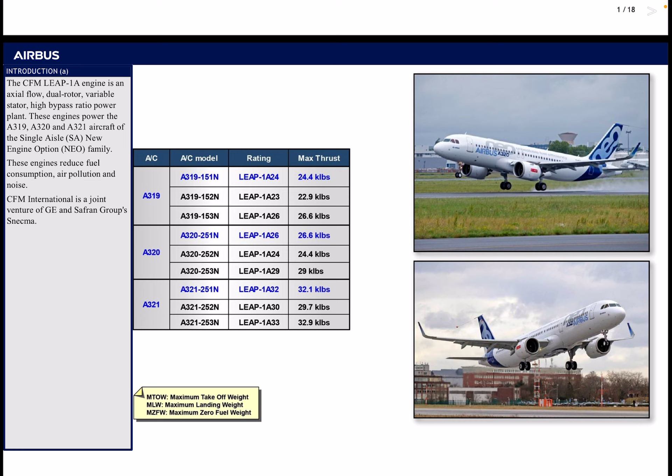As we said, this is a New Engine Option family. This engine reduces fuel consumption, air pollution, and noise. CFM International is a joint venture of GE and Safran Group.

The CFM LEAP 1A engine is available in several thrust ratings from 23 kilo LBS to 33 kilo LBS. For each model, the basic thrust ratings are referred to with 1, which is basic thrust rating, 2 for reduced thrust ratings, and 3 for increased thrust ratings.

As we can see in the table, the A320 is categorized into 3 aircraft models. One has a maximum thrust of 26.6 kilo LBS, another has 24.4 kilo LBS, and the last one of A320 has 29 kilo LBS.

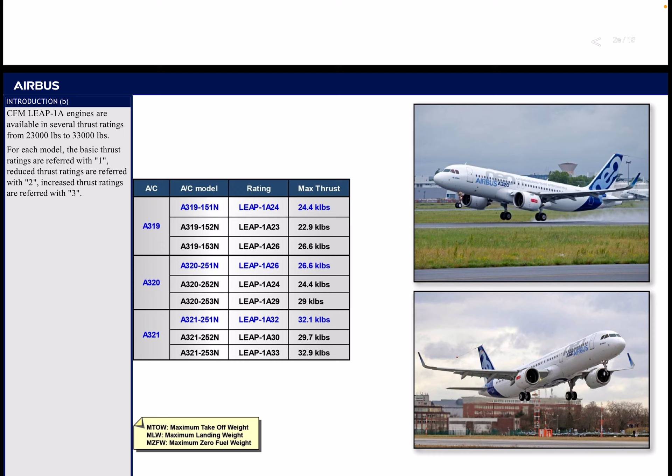The engine is attached to the pylon by forward and aft mountings, as usual in different aircraft, to transmit the engine and thrust loads to the aircraft fuselage. The pylon connects the engine to the wing structure. The engine nacelle ensures smooth airflow both around and into the engine, protects the engine and engine accessories, provides engine noise attenuation, and permits access to the engine and its components for servicing.

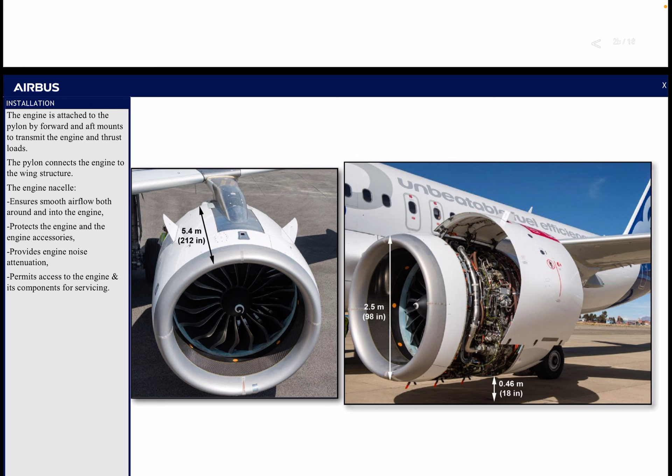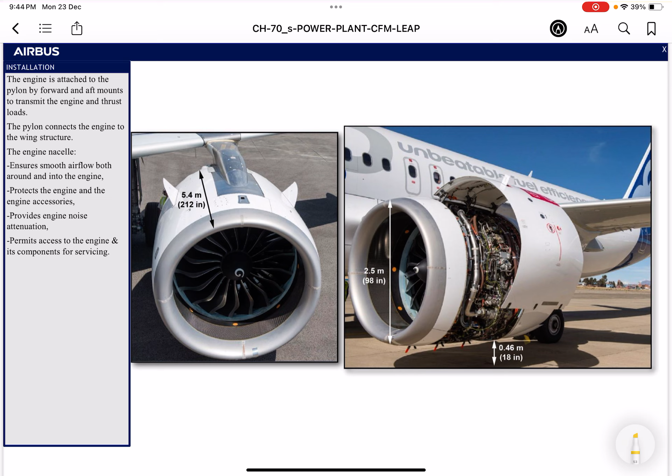As we can see, there's a little bit of clearance in there.

The power plant major components are air intake or inlet cowl, fan cowl doors with 3 latches, thrust reverser cowl doors with 8 latches, engine build-up, exhaust nozzle, and tail plug.

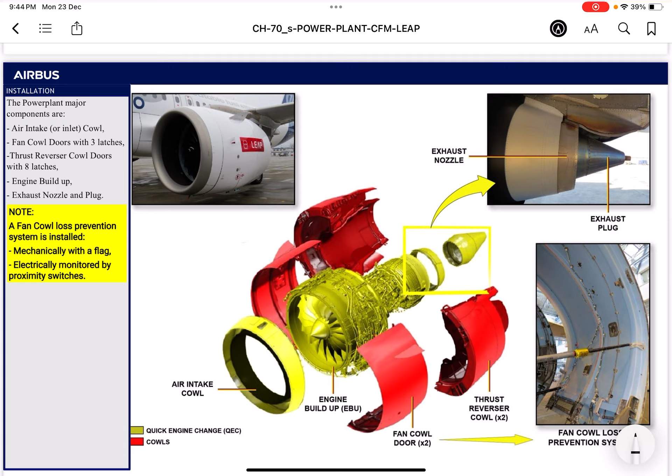The red part is a cowl for the engine. This is a fan cowl door, and this is a thrust reverser cowl. The engine build-up is the core engine for the A320 family, and there is an air intake cowl to preserve and keep the engine protected, along with its fan.

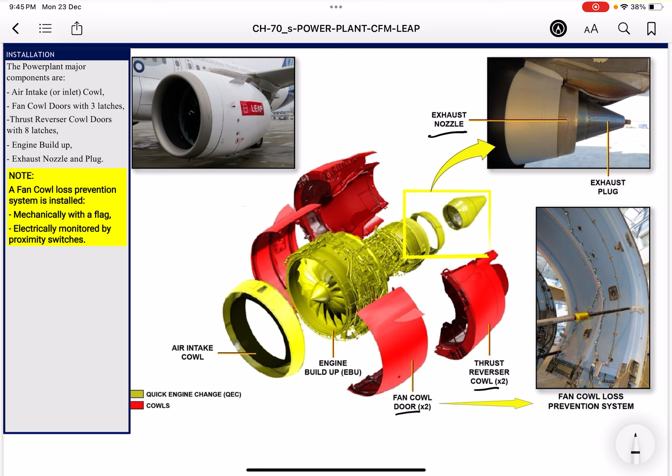This is the exhaust nozzle, exhaust plug, and fan cowl loss prevention system.

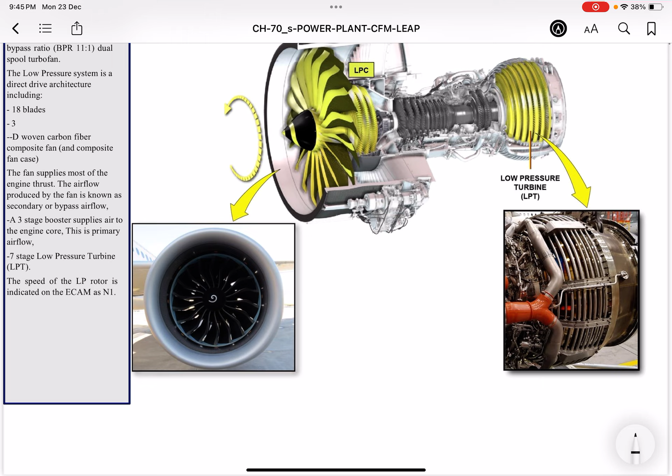The CFM LEAP 1A is a high bypass ratio, 11:1, dual spool turbofan. The low pressure system is a direct drive architecture including 18 blades and a 3D woven carbon fiber composite fan and composite fan case. As we can see, the fan itself is made from carbon fiber composite, and the fan case itself is also made up of composite material. The fan supplies most of the engine thrust, as we know.

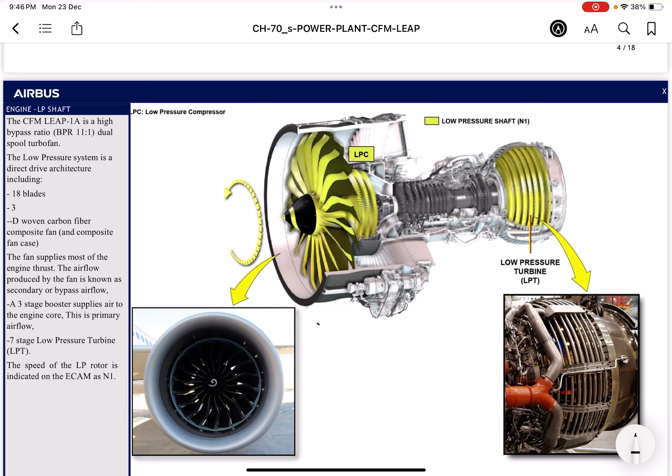The airflow produced by the fan is known as secondary or bypass airflow. A 3-stage booster supplies air to the engine core; this is the primary airflow. There are also 7-stage low-pressure turbines. The speed of the low-pressure rotor is indicated on the ECAM as N1. This is the engine LPC and LPT, low pressure compressor and low pressure turbine.

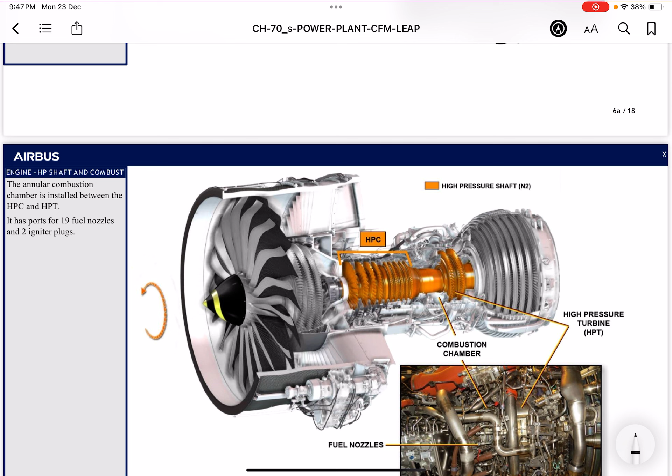The combustion chamber is of annular type, installed between the high pressure compressor and high pressure turbine. It has ports for 19 fuel nozzles and 2 igniter plugs.

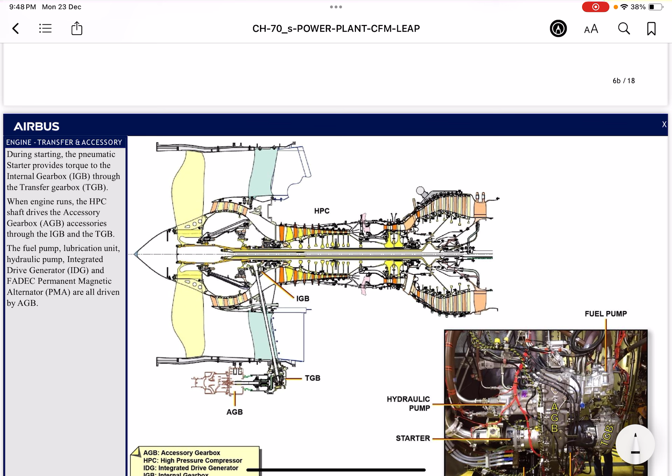During starting, the pneumatic starter provides torque to the internal gearbox through the transfer gearbox. When the engine runs, the high pressure compressor shaft drives the accessory gearbox accessories through the IGB, or internal gearbox, and transfer gearbox.

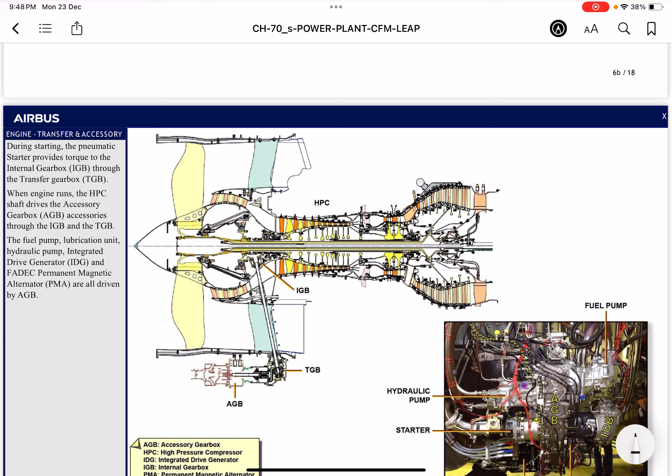The fuel pump, lubrication unit, hydraulic pump, integrated drive generator or IDG, and FADEC permanent magnetic alternator are all driven by the AGB, or accessory gearbox. This is the accessory gearbox, and this is the TGB, or transfer gearbox.

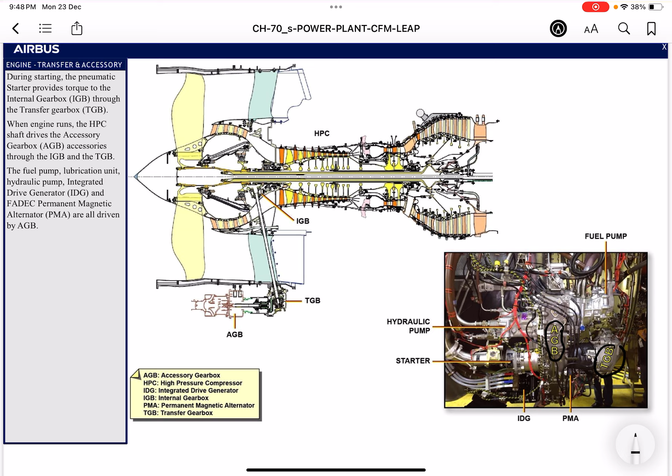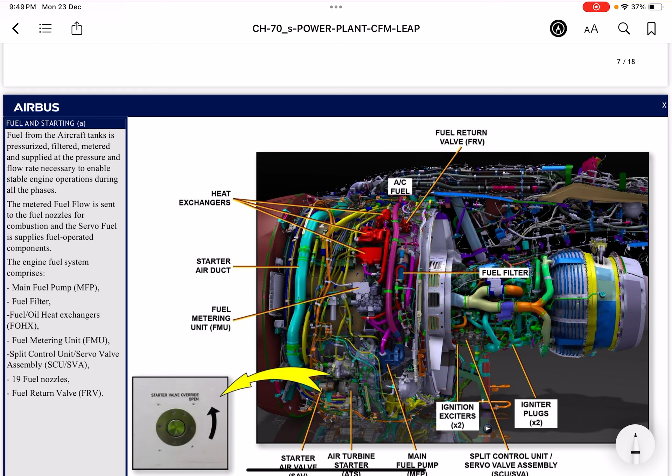Fuel from the aircraft tanks is pressurized, filtered, metered, and supplied at the pressure and flow rate necessary to enable stable engine operation during all phases. The metered fuel flow is sent to the fuel nozzle for combustion, and the servo fuel supplies fuel-operated components.

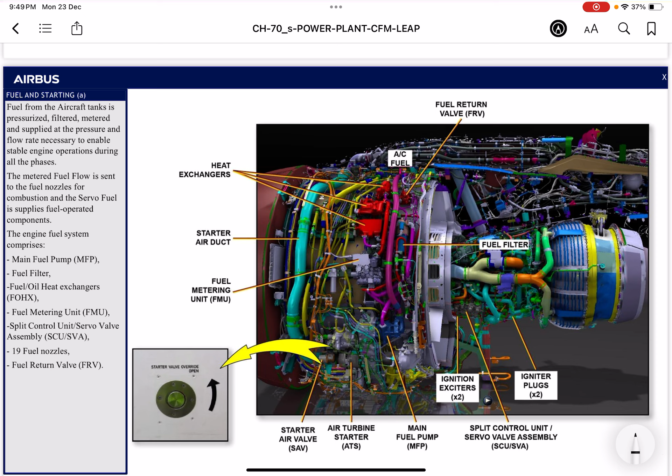The engine fuel system comprises the main fuel pump or MFP, fuel filter, fuel/oil heat exchanger, fuel metering unit, split control unit, servo valve assembly, 19 fuel nozzles, and fuel return valve. As we can see, the colored figure shows the heat exchanger, starter air duct, fuel metering unit or FMU, ignition exciters, and igniter plugs.

The aircraft pneumatic system supplies bleed air for engine starting via a bleed duct on the left hand side, a starter air valve or SAV, and the air turbine starter ATS. Two igniters can produce sparks within the combustion chamber to ignite the air-fuel mixture.

The compressor airflow control is done via the following: VBV, or variable bleed valve, modulates primary airflow; VSV, or variable stator vane system, controls the amount of airflow in the high pressure compressor; start bleed booster anti-ice system eases starting and avoids icing on the booster inlet using 7th HPC air discharge; TBV, or transient bleed valve system, discharges part of the HPC 10th stage air to unload the compressor.